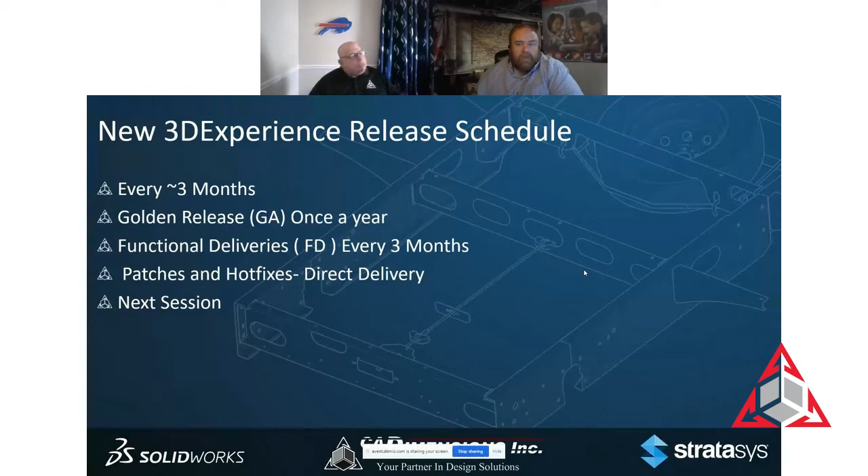When it comes to patches and hotfixes, they're delivered to you directly. As you see me introduce how you launch it, this is also how it will deliver a patch and tell you, hey, this thing has an upgrade for you, go ahead and do so. So that's the release schedule. The next release is about another 2 months away. This one just came out. It comes really fast, so the release schedule is nice because you're constantly getting new tools in the arsenal.

So let's start to walk through the top 10 enhancements in FD03. I understand we've got a big group online. Some of you have seen the 3D Experience platform, some of you are using it, and some of you may have never seen it. So I'm going to do a little bit of backstory on each of these so you know where it was and where it is now. Here are the top 10 enhancements, focused on SolidWorks users in those particular roles. The first one I want to introduce is something we call the Welcome app.

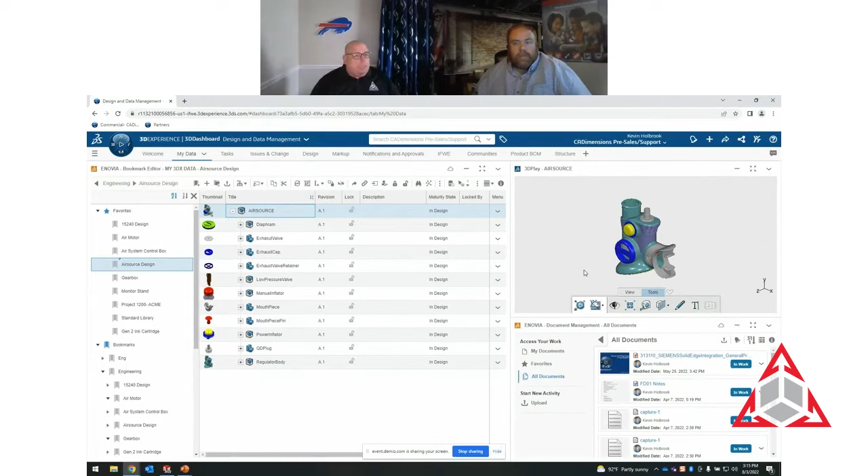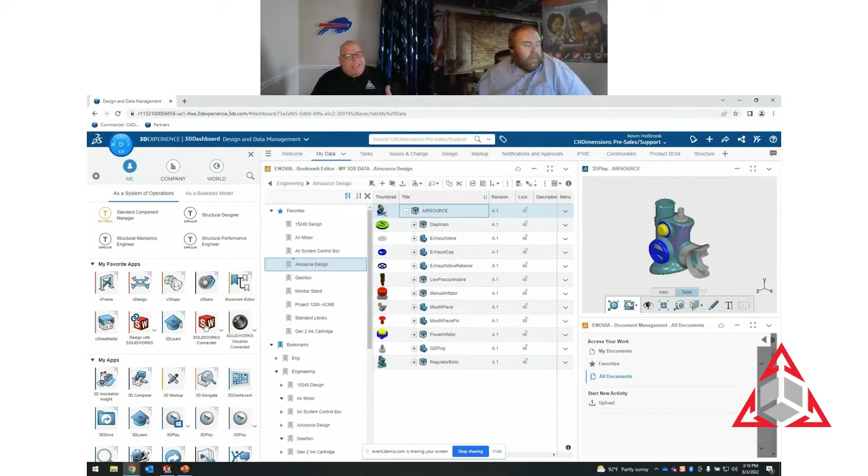I'm going to jump to my 3D Experience platform. Clearly, this is outside of SolidWorks. The reason I bring you here is because prior to FD03, if you're going to launch 3D Experience SolidWorks, we recommend that you go to the web page and launch it using an icon. Let me show you what this looks like. It's just an icon that says Launch SolidWorks Connected. If I click on it, it will launch SolidWorks Connected locally on my machine. That's a fine process, but they wanted to make that whole thing a little easier.

So they've created a welcome app, and I'm going to introduce you to this. The welcome app runs in the web page, and it becomes the landing page for the cloud. When I first jump out here, I can be welcomed with this screen at all times. It has a bunch of things on it. First, it has links to the Learning Center, a series of learning videos. Regardless of what you're trying to learn, there's a bunch of content for you to consume. There are also links to public communities. If you've ever posted in the SolidWorks forum or other communities, those will be listed here as well.

But most importantly is this area off to the left. When I launch the Welcome app, it's going to take a look at your machine and your login and give you some insight into the apps that you have access to. It groups together the design apps, really what this session is focused on, into one section so I can clearly see what I have access to.

Now, to the right of each of these bars, you'll find a button that will allow you to open it right up from here. So I don't have to go and find the icon; I can open it directly. There is also a little information window here that has links to some of the learning specifically for that app.

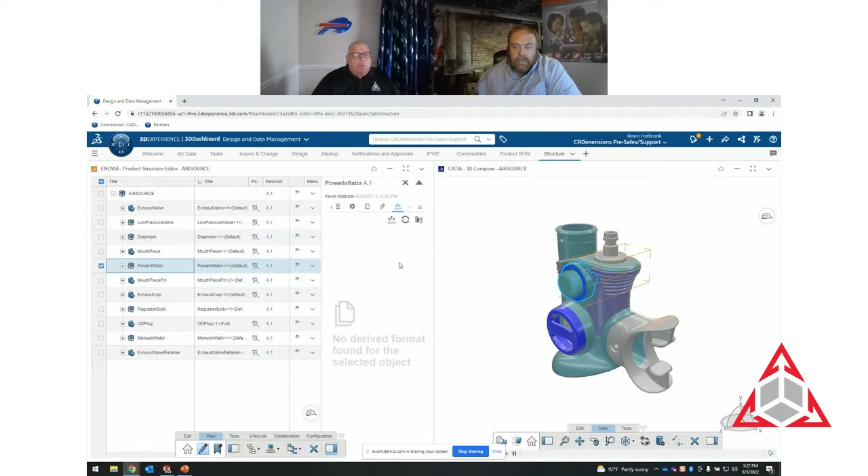Okay. Once they're all generated, or you have what you need, we often got asked, well, how do I gather up all the step files and the PDF files, put them in a zip file, and send them to somebody? Well, that's very simple now as well. So if I click the upper level assembly, there's a button here that says download all derived outputs.

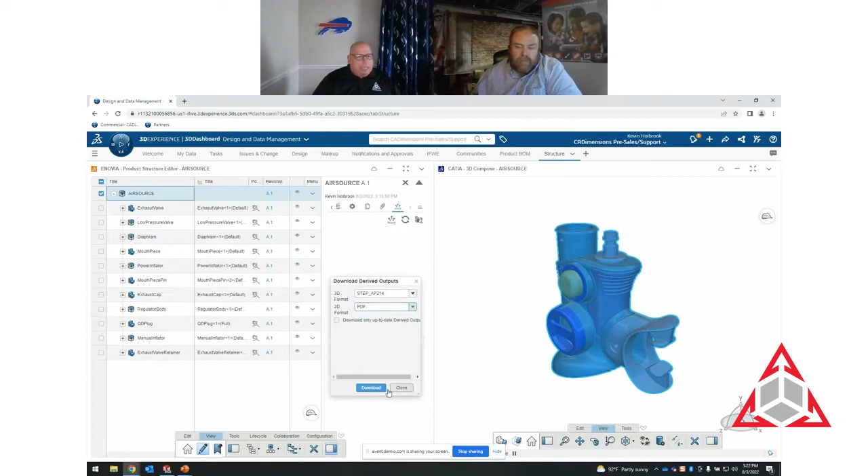I can say, give me STEP files for 3D models, PDF for the other, and I say download. Now, I don't know how many STEP or PDFs are in here, but I'll immediately get a zip, and I can open this up and see the files that were exported from that. So nice, easy ways to self-serve STEP and PDF files.

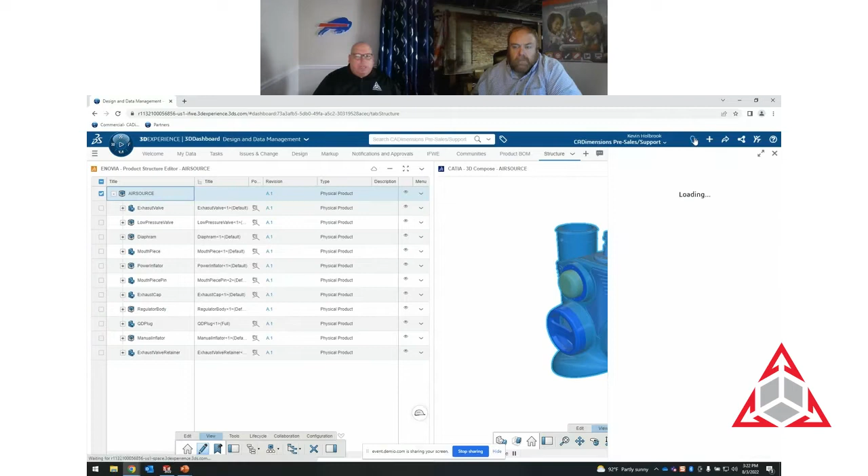Let me show you what this looks like when you generate an extraction. The extraction shows up as basically an email saying your export is ready. If you click on it, it brings you to a location where you just have a download button to download the zip file. That zip file will show up in your downloads folder, and then you can open it up and all of your CAD files will exist in there.

So here we go, go ahead and open it up, and you can see there's all the files from SOLIDWORKS. Fairly new, and it's going to allow us to get data out much easier. Now, these were the only two enhancements that were focused on the CAD process, not necessarily the CAD.

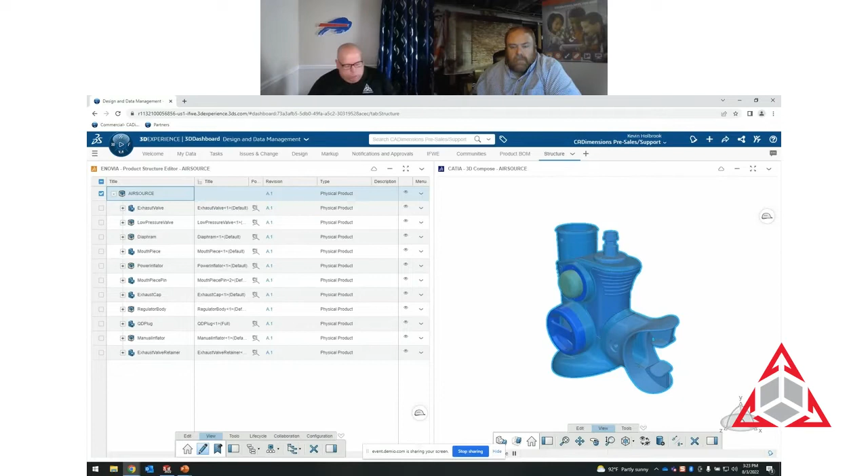So let me transition over, and let's talk about what's new, item number 3. This is probably the most anticipated enhancement in FD03. 3D Experience SOLIDWORKS, which I'm going to introduce here in a second and give you a look around, is cloud connected. In other words, it always must be connected to the cloud until FD03, which we can now perform an offline mode. So offline mode, what does that mean?

Offline mode means that you can disconnect from the internet at 30-day increments. The rule is you must grab any files that you need, pull them down from the cloud, because you can't go access something until you reconnect, right? If the internet went down, you can't do that.

Before I introduce where offline mode is, I think it makes sense for those on the call that have never seen SOLIDWORKS Connected to get a look around. What should I expect to see within this environment? Let me turn that pin off here.

So SOLIDWORKS Connected, because it's launched from the web page, the welcome app like you saw, launches local on the machine, but this version of SOLIDWORKS is a little different. This version has the cloud completely embedded in it. I have a toolbar in my command manager with functions specifically related to data management on the cloud. I will have on the right-hand side two tabs in my task pane: one that compares the files I have open to what the latest is on the cloud, and one we call the Cache Explorer, which I'm going to introduce a little bit more in a second.

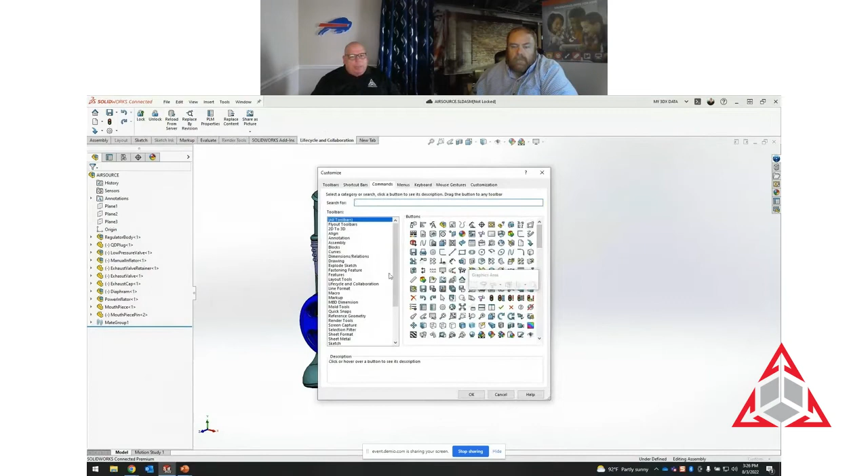So the reality is that this is a SOLIDWORKS version where the cloud is built into everything we do. Even at the top where it used to say here's the file you have open, it tells you whether you've locked the file or not. It tells you where you're connected to on the cloud. It tells you what you're logged in as on the cloud. If I were to try to customize a toolbar, I can add my lifecycle and collaboration tools to any toolbar. So this is a different level of SOLIDWORKS than you may have seen.

So this is SOLIDWORKS Connected. Now, because it needs to be connected to the cloud and integrated as closely as possible, they did make some changes, even to things like the pull-down menu. Save or save as are now saved to the cloud or saved to this PC. Instead of save as STEP, it's now export as, because we're exporting it from the cloud as a new version.

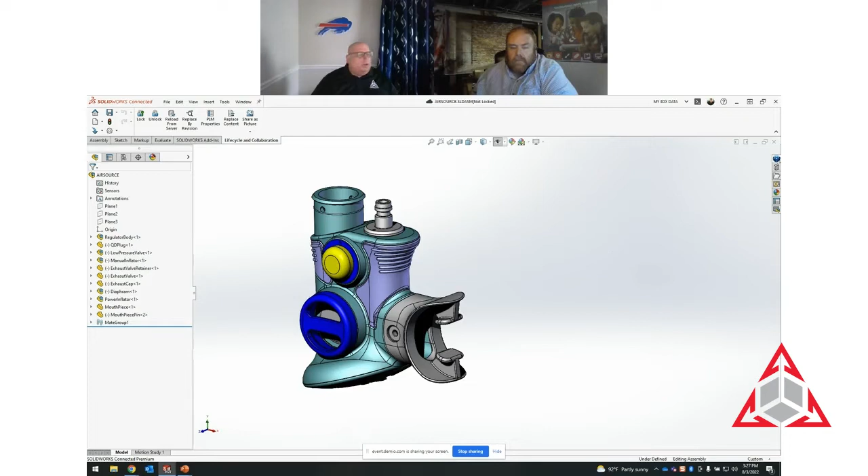So this is what the connected version looks like, and this is what we're going to highlight over this session, over weeks. We're going to talk about workflows. We're going to talk about how to use certain things, replace parts, change names, things like that. But this is SOLIDWORKS Connected. Now, the connector, the other version I've been talking about, is really just SOLIDWORKS as you know it today. The only difference is you have the add-in and the Cache Explorer, the two tabs.

Everything else about SOLIDWORKS is exactly the same. It's desktop SOLIDWORKS as you know it.

Okay, now back to our top 10 what's new: offline mode. So here I've opened up a file, and now I want to go offline. I'm going to go away for 30 days. I'm going to work on this assembly. I don't need the internet. I don't need to be connected.

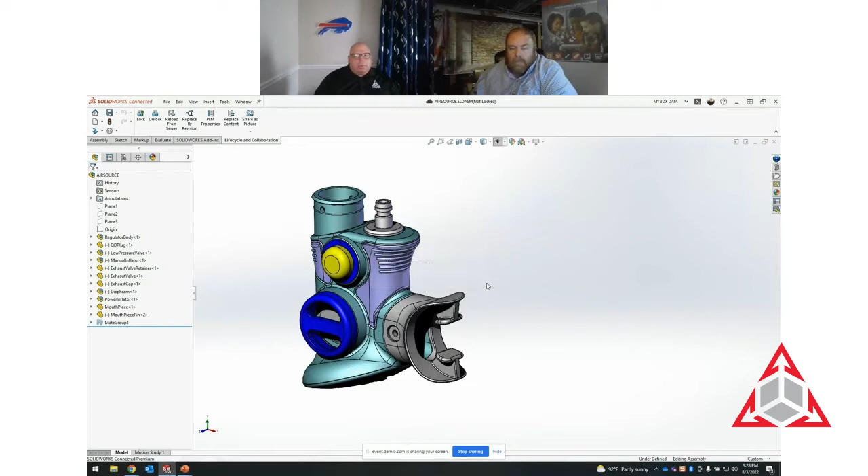If you go in the upper right-hand corner of your SOLIDWORKS Connected, that's where your login is. If I select that login, there's an option in here to work offline. And it tells you, hey, first of all, you must close all your documents. So let's go ahead and close that. Let's just see exactly what it tells us here.

Now it just kind of guides you through. Hey, if you want to go offline, this will take effect immediately. You can work offline for up to 30 days, and you could reconnect at any time. After 30 days, it will automatically reconnect you. It has to make sure that it's pulled the new license for an additional 30 days.

Make sure that you have downloaded all the files and that you're ready to go. This allows you to disconnect from the cloud whenever you feel like you're getting on the plane. You know you're not going to have service. Pull down the files, disconnect, and work.

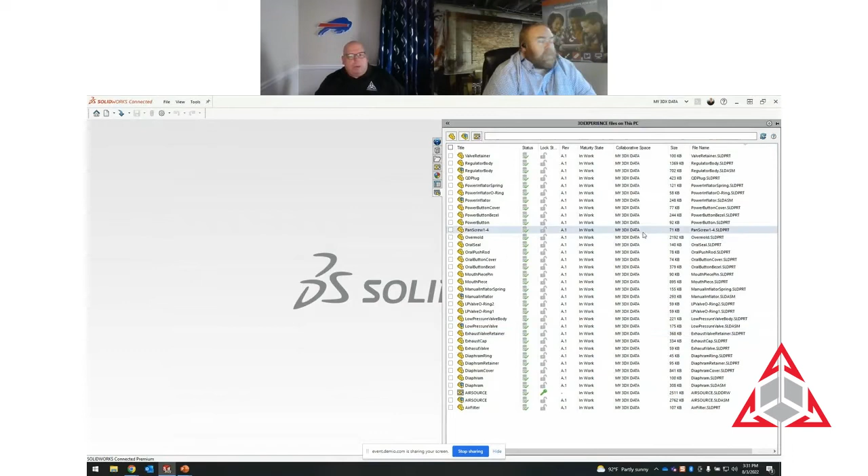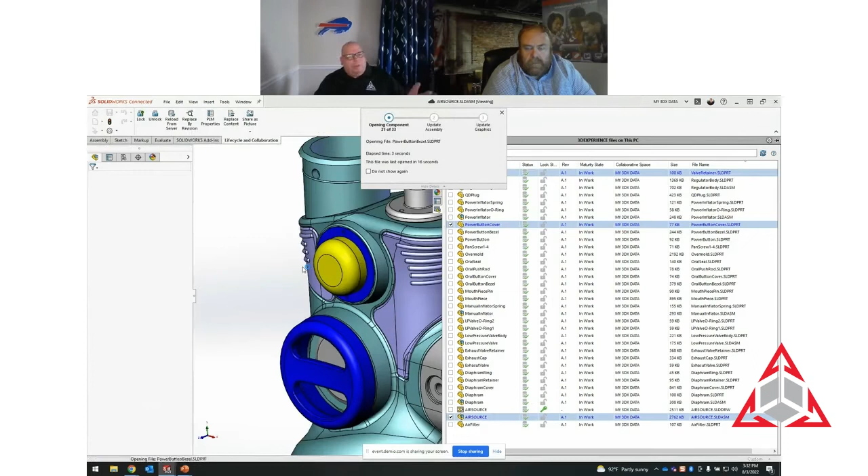What I love the most, however, is the ability - they gave you this in the last release - the ability to delete from my PC. But I love this: you can actually now open directly from here. So I can take this file, drag and drop it directly into the open screen, and open the file directly from my cache. I really don't even have to go to my cache anymore. I can really just work out of this Cache Explorer.

Now, when something is open in the Cache Explorer, you can see, because of my settings here, the valve retainer, power button, and air source. I have multiple files that have been opened because of some of the references. So there does give some feedback along the way as well.

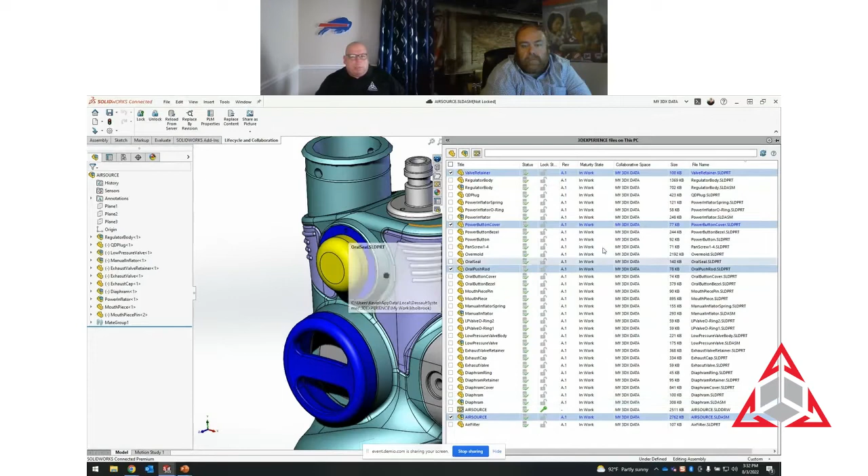So Cache Explorer enhancements, that was a big one with FD03. I'm going to close this down. You can see here's the other two files that got opened in the background. That's just because of my settings.

Insert from search. Let me explain this. This was just another little nuance of what they're trying to do with integration.

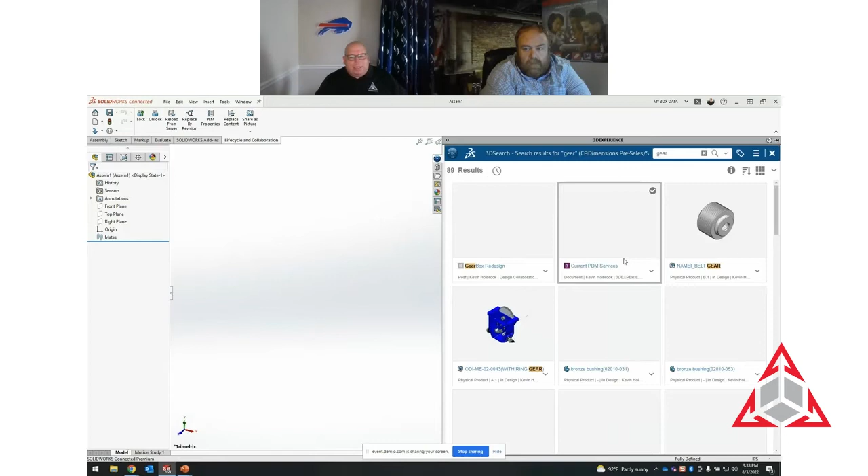So I'm going to open up an assembly, and I want to add a file to the assembly from the cloud. So it doesn't exist on my machine, it's not cached locally. So what I can do in this case is search on a particular file. Let's just search on gear, and I'll find a gear in my system that makes sense to drop in. Now, it's allowed you to drop in for a while, but it hasn't done a full integration. In other words, it didn't act like a SOLIDWORKS file would if I drag and dropped it from Windows Explorer. It didn't treat it the same.

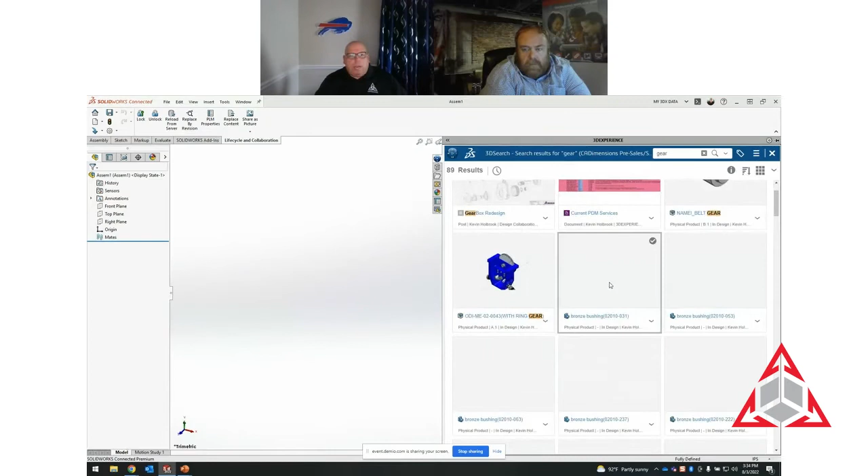So what I really wanted to do is treat it the same. Let's just take one of these bushings. When I drag and drop now into the assembly, it will launch the insert component command.

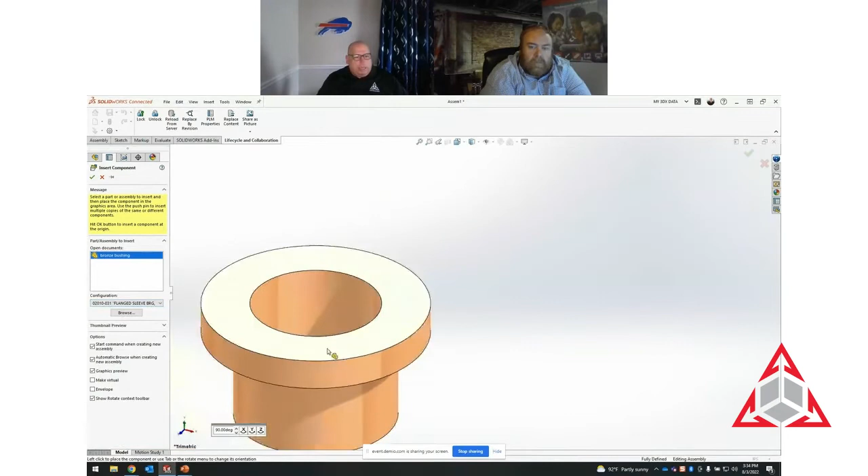Now there's a couple reasons why that's important. One, we can switch configurations. This bushing has many different sizes, and I can pick the size I want directly from the cloud. Another thing I really like is you can get your rotations in here. You can also set up some of your default options for your initial drop-in, and you can drop in multiples if I had that option selected.

Before, I used to just drag and drop it in, and it would do nothing. It wouldn't bring up a dialog. It was not aware of the fact that it was going into SOLIDWORKS. I think this should be a good indication of how tight they're making this integration with the 3D Experience platform.

Okay, so we're up to 5 here. Let's keep going. Some basic revision enhancements. Let's open up our AIRSOURCE again. I'll just do that right from my cache.

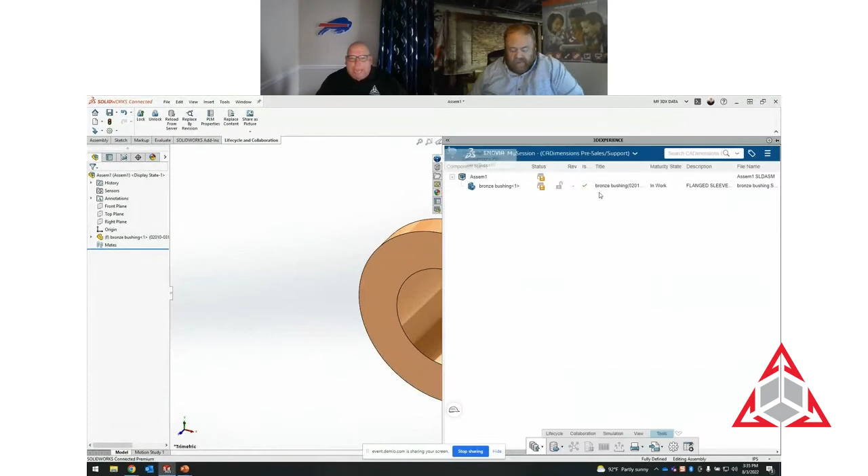Now, since I already have a file open, what I usually do is drop it right on my command manager. Then it knows I'm not trying to drop it into a part, and it will open up my files in its own window, and I can continue to move.

Now, what they've done in FD03, first thing they've done is changed what it looks like. Let me expand this column out, the one that says, is this the latest revision of a file? So you can see clearly that this overmold is not the latest revision. This icon is different - it used to be a tiny little plus sign, you almost cannot make it out. Well, now with the red X's, you can make out what's going on here.

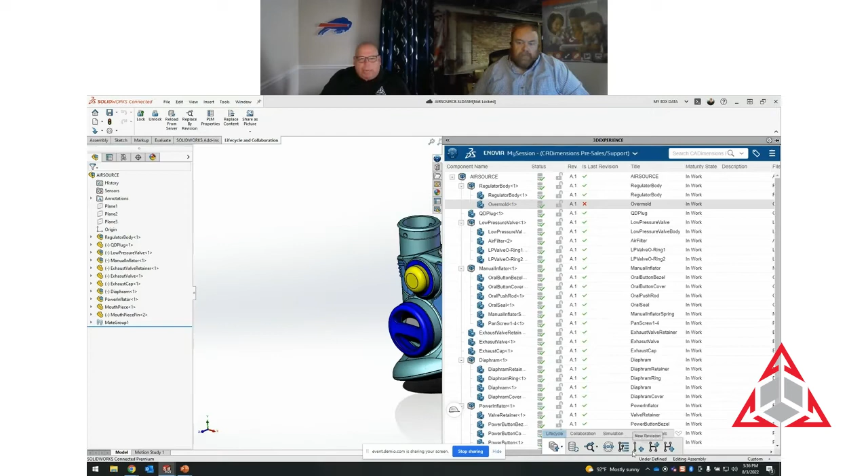The other thing they've done is added the revisions icon to the action toolbar at the bottom. So now, if I wanted to load another revision, I can go back and see what revisions there are and make the decision of what I want to do. Now, to actually do the load, all I do is say, hey, I want to replace by revision, and I want to pick the latest revision, in this case, to load.

So it makes it a little bit easier to see. I can also see how many revisions have been created, and I can load the one that I want without a problem. Simple little things, but it makes the workflow that much easier.

Also, default bookmarks. Now, for those of you who have never used the platform, I need to explain what a bookmark is. When we save files to the cloud, we need a way of organizing, because we're not saving them to Windows - there's no Windows folders. That technology is a little different. So we use something called the bookmark editor. For all intents and purposes, the bookmark editor is nothing more than folders.

It's a little different when you dig in deep, but as you can see here, double click to open. When I get to what I'm looking for, the file exists when I get there. It's really a folder system. Well, when I save files to the cloud, I can choose which bookmark things go to.

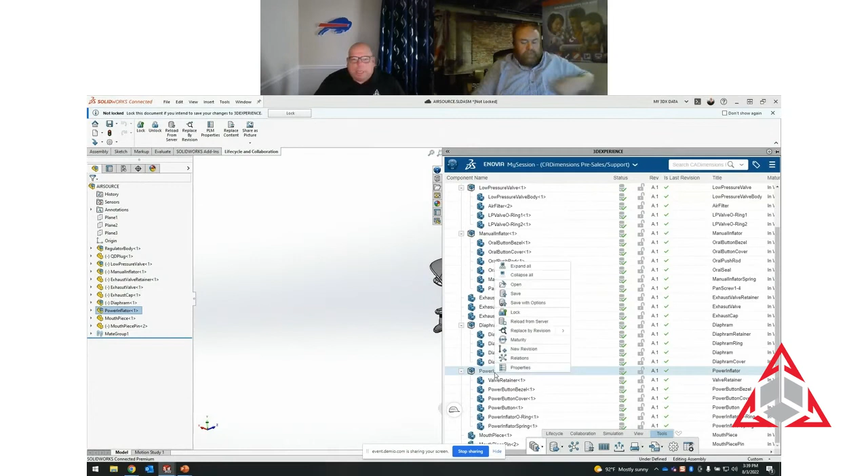So match drawing to parent. Let's pick one. Let's see here. Let's just take this here. We'll open this thing up in its own window. I want to create a drawing for this, but I want the title of the drawing to be named exactly the same as the assembly.

Inside the add-in is going to be an option that says use the part or assembly title as the new drawing title. So whenever I create a new drawing, I don't have to give it a name. I'm basically telling it to name it the same as the part or assembly that's used to create it. Now I can do that when it's first saved or every time it saves.

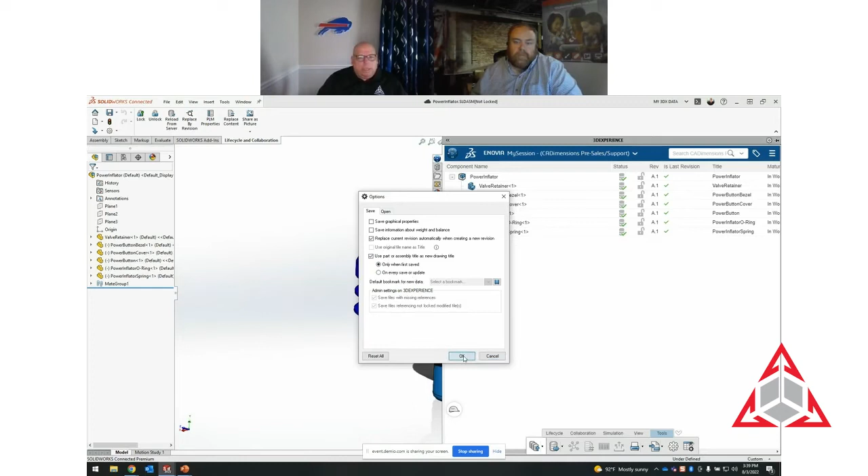Why would you do it every time? Because if the part or assembly title changes, it will change the drawing title to match, so there's never a mismatch. Now I'm going to keep mine as only when you first save. So let's create a new drawing. Okay, we just said power inflator here. I'm just going to put a single view on here just for the sake of our conversation.

Now you can see right here, the title is empty. It knows what the name of the file is because the file was attached. Now the reason I'm focused on title, it's probably confusing, but title is the unique identifier on the platform. You can't put two files out on the platform, in the cloud, that have the same title unless you want to.

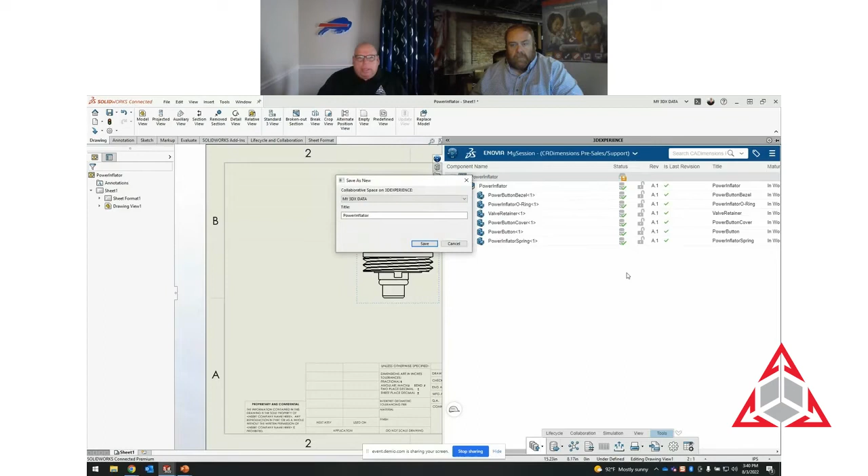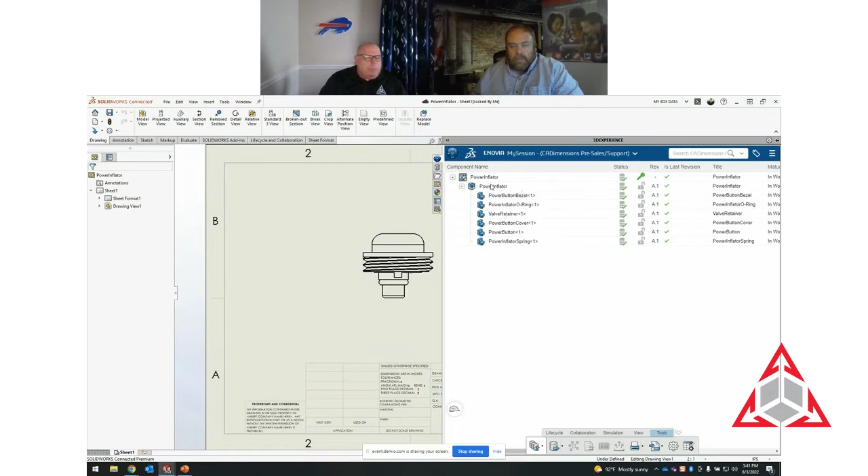So watch what happens when I do a cloud save. I'm just going to do a simple cloud save of the drawing. I tell it where I want it to be stored. And you'll see that it automatically pulled the title from the assembly that was on it, and this will be pre-populated. So that will maintain a relationship here. This will keep those in line and keep those connected. So that is new in FD03.

I saved the best for last. I truly believe this is a game changer. It's a new way of collaborating with stakeholders. Stakeholders that take your data and are going to make modifications or add their own files to it. And then you're responsible to bring it back into the cloud and incorporate their changes into your data. Let me show you this.

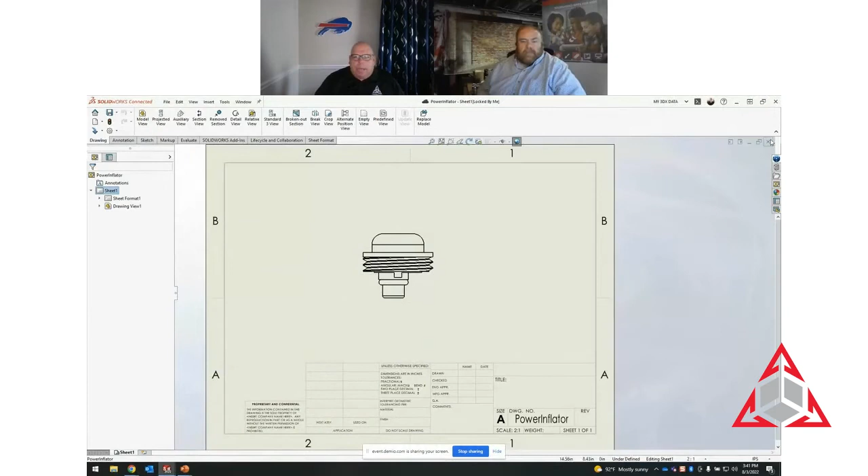This is really phenomenal. So I'm just going to go back to our air source here for our example. I want to be able to send this to an external vendor, and I only want them to be able to update one subassembly in the upper level. So in my tools action bar is a command that allows me to both import and export a package.

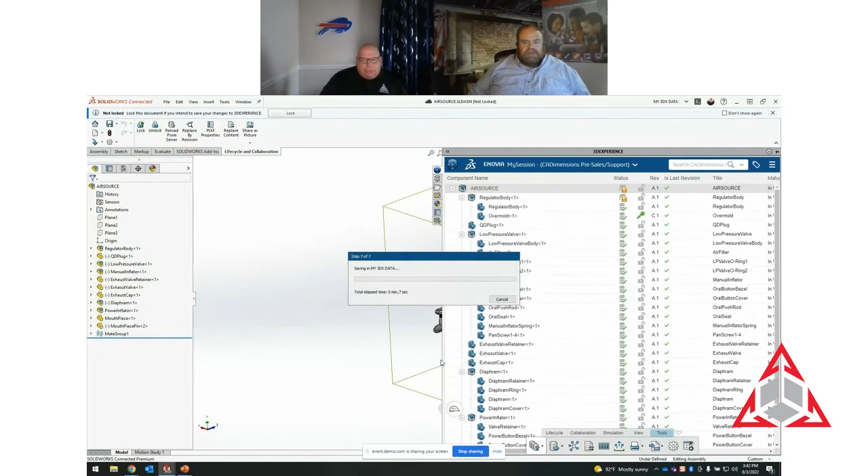When I export a package, oh, it's telling me save it. Let me just do a quick save on this. When I do a save, it's doing a cloud save. Any changes that I've made on the files, it will update them on the cloud side. It sees that I changed the revision, that part's part of an assembly, and that assembly is part of the upper level, so it's asking me to update those.

Let me also unlock all these files. There's no need for me to have them locked. These are kind of outside the scope of what we're talking about. So I want to create an export because I want to give this to an external vendor. When I do this, it will open up an app that runs directly in the task pane that allows me to choose what the external vendor is going to have access to.

We'll use this first section here. I want the external vendor to be able to add files to the upper level assembly, modify the power inflator, but I only want them working on the valve retainer.

I can control which files they can edit. Now, there is also a button up here to add drawings. So if there happens to be a drawing related to this, I can say add drawings, and it says, oh, there's one drawing found, and it will add it to the list of drawings, and you can say, does it go out for edit or read only? But you can choose what's done there, okay?

What it's gonna do is create a new type of zip file. It has a completely unique extension. It's an SLD PKG, a SOLIDWORKS package. Once we get this set, we choose where we're going to deliver it to the customer. We can save it directly to our machine, so give it a name, and it saves the SLD PKG wherever you want. You can send it in an email or another delivery system. For those of you who are aware, the platform has a Dropbox-like delivery system we call 3D Drive. We can actually save it directly to 3D Drive.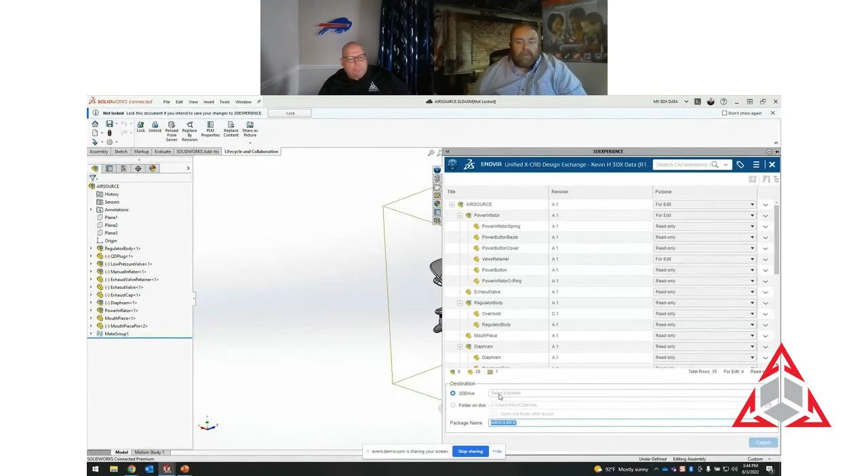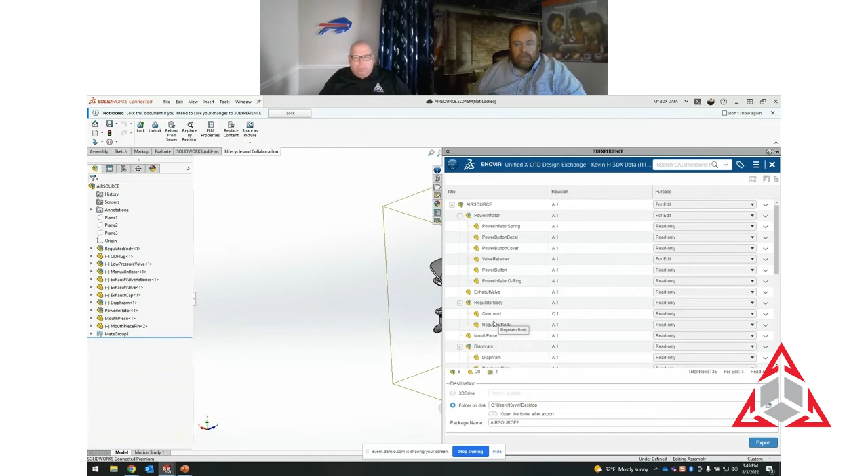Okay. In this case, I'm just going to call this Air Source 2, and we'll go ahead and export this to my desktop. Okay. Now, what does the customer get? How does the customer even work with an SLD PKG? On the SOLIDWORKS website is going to be a free add-in that you can point them to that they can download that will allow them to do a simple import of a package. It's going to look a lot like what I'm getting ready to do here. So imagine somebody who doesn't have the cloud, doesn't have connected, but still wants to work with you. You could do an import package.

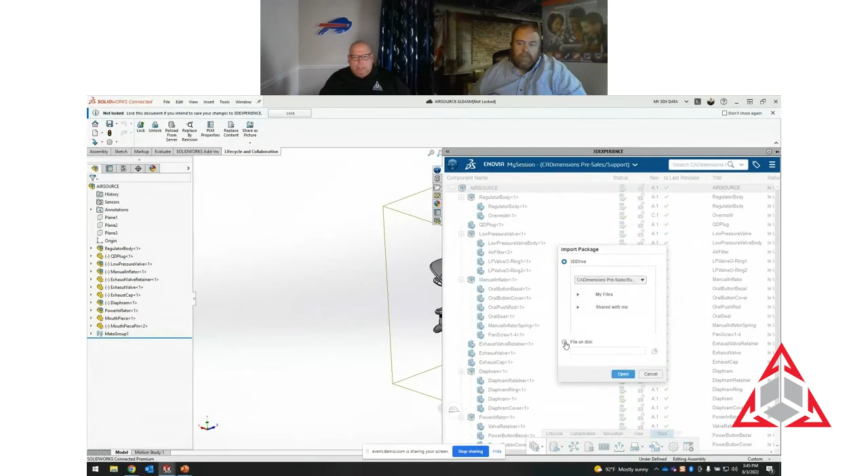Okay, I'm going to pick this. I have one on the disk that I can show just for an example. And when they select open, it's going to show them what files they have access to. Okay, this will bring it open. They're going to be able to pick a single file and open it up from here. So notice this matches, here's the files you have read access. Here's the ones you have edit. Now this is an old one that I made. You can see I have a little bit more for edit.

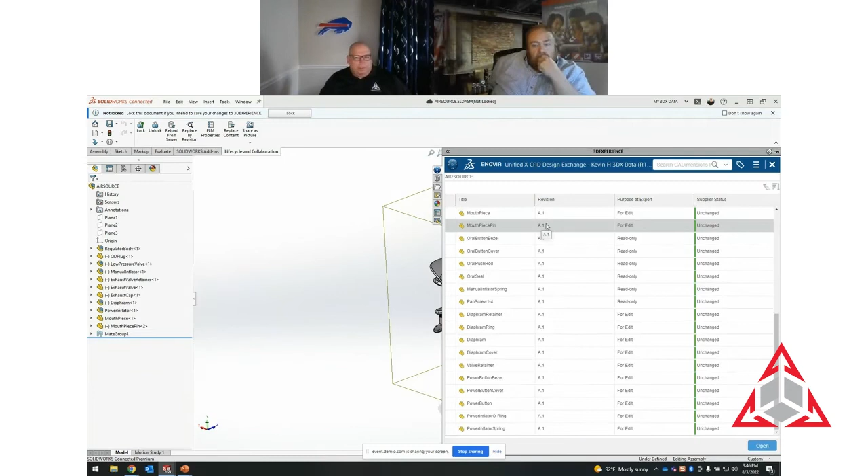Now for you, when you get the package back from the customer, you're going to have this supplier status column that shows you if the supplier has changed any of the files that you've given edit permissions on. It's kind of hard for me to make an example by myself, but if it was changed, there's going to be an option to overwrite the current rev if it's in work, or create a new revision. So this function is going to allow you to export and control permissions, bring it back, and integrate it back into your data management solution, all while you're in SOLIDWORKS. Okay. This is new in FD03.

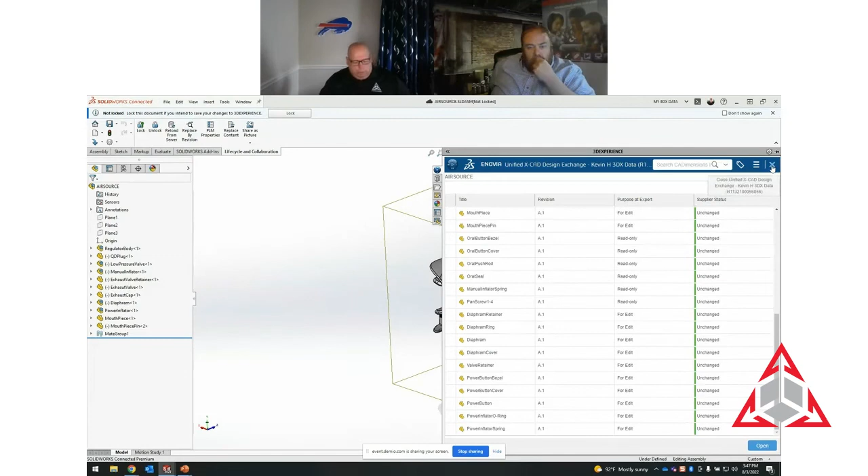The last thing I wanted to talk you through is XApps. I didn't want to leave these out. There was a lot of good stuff in 3D Experience SOLIDWORKS. The XApps are, we'll call them, growing up, right? They're becoming SOLIDWORKS on the cloud.

They're, I explained to somebody, they're like a tweenager. They're still a little bit awkward. There's some things they don't do very well, but you know it's going to be good. At least that's what I think of my tweenager.

But I wanted to show you what they've enhanced in XDesign, because you're going to clearly see that these are things that we've had in SolidWorks for a while. But they're adding these things because they're going to make this thing look like and be like SolidWorks. So here are the 5 things that I highlighted just in XDesign. And then I'm going to take you in and do a variable fillet so you can get a sense of what it looks like.

So first of all, they've updated the design manager, just like the feature manager, to give better feedback. They've added variable fillets. Loft selection manager, that's something we've had in SolidWorks Desktop. The ability to flip a mate alignment, right? Something that we take for granted, but it's now in the XDesign tool. And then sketch patterns that automate the dimensions. Now you're immediately going to look at that and say, yeah, I have that on desktop. What I want you to just consider is that this tool is growing up.

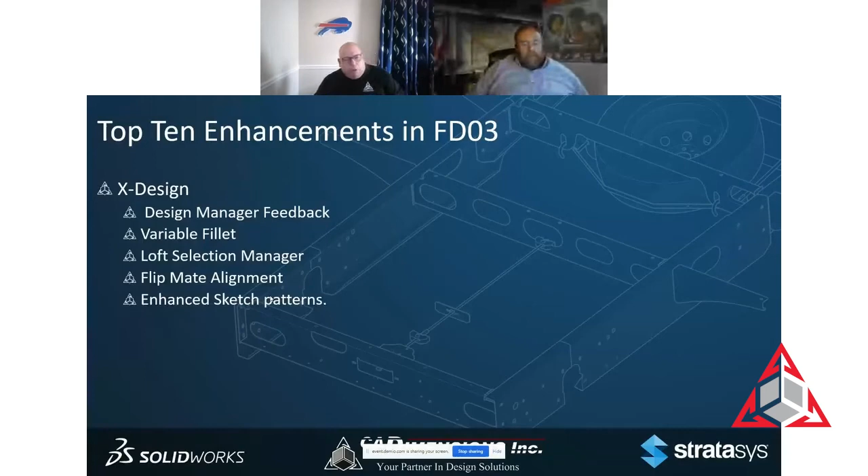This is going to be as good as SolidWorks Desktop someday, but we'll be able to run it completely on the cloud. So let me show you what it looks like. Okay. So in my web page for the cloud, I have my XDesign loaded on a tab, so I can launch my, let me just refresh my page here. I can launch my design app directly from the web page.

Okay. In this case, I want to create a new part. We're just going to call this webinar. And when I create the part, this is just like doing file new inside of SolidWorks, right? It's going to go ahead and create the file. It's going to store it in the cloud data storage, and it's going to give me access.

Now, let's see if I can get this thing out of the way here so you can see the whole toolbar. I'm not going to spend a lot of time in all the details. We'll probably cover some things in either next month's session or after that and get a little bit more detail. But you should probably already see this. It looks a lot like SolidWorks. Sketch, features, surfaces, assembly. But let's go ahead and create a quick block, and we'll put a variable fillet on it. This is going to look just like SolidWorks.

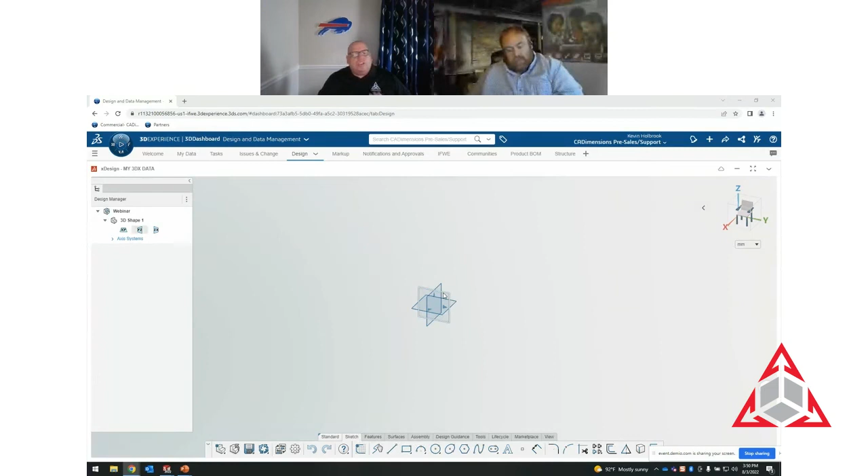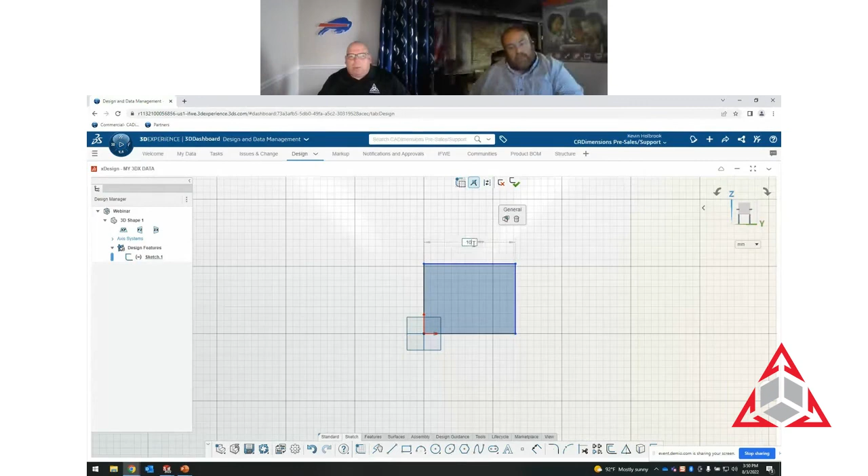I pick a plane. I create a sketch. It brings it normal. I hit my S key. It allows me to grab a rectangle. I can draw the rectangle. Now here's something unique to XDesign. Instead of adding a dimension using the dimension command, I could just pick the line, pick the dimension, and type in the value that I want. Makes it a whole lot faster to do what I want.

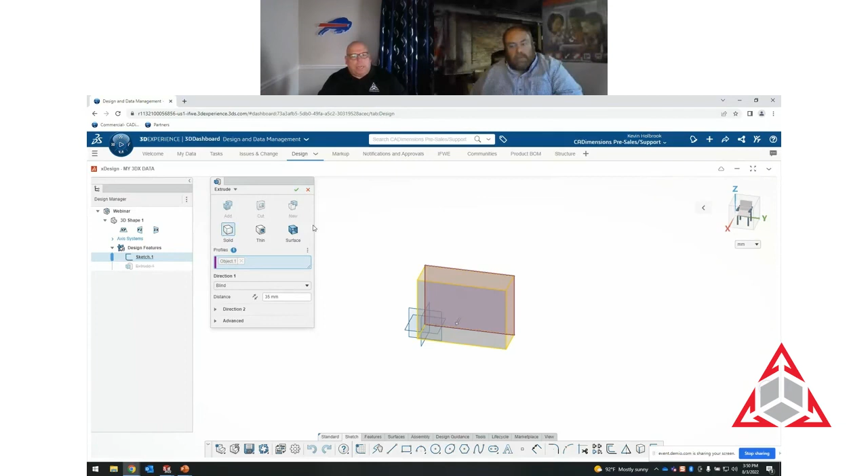I can exit my sketch, hit my S key again, and go ahead and extrude, and I can pick the area I want to extrude. Notice the dialog for extrude has everything built into it. Add, cut, thin, surface. I can create anything. We call these super features, but they're still very SolidWorks-like. So let's talk about variable fillet, something that they've added in FD03, a function that didn't exist.

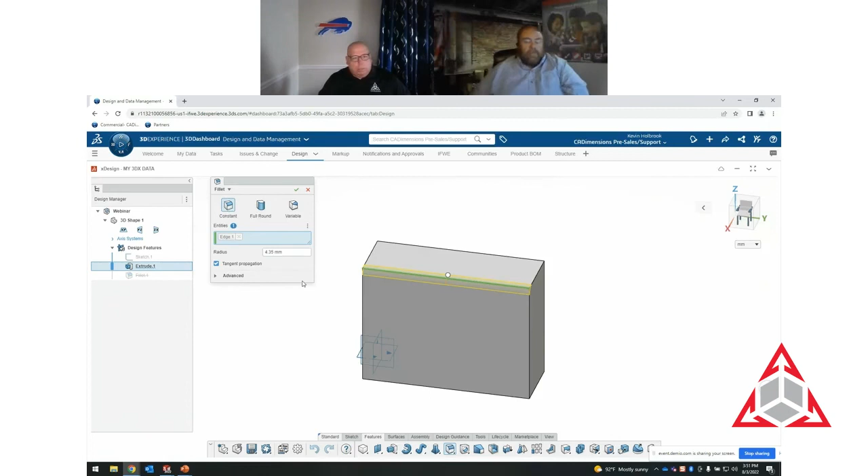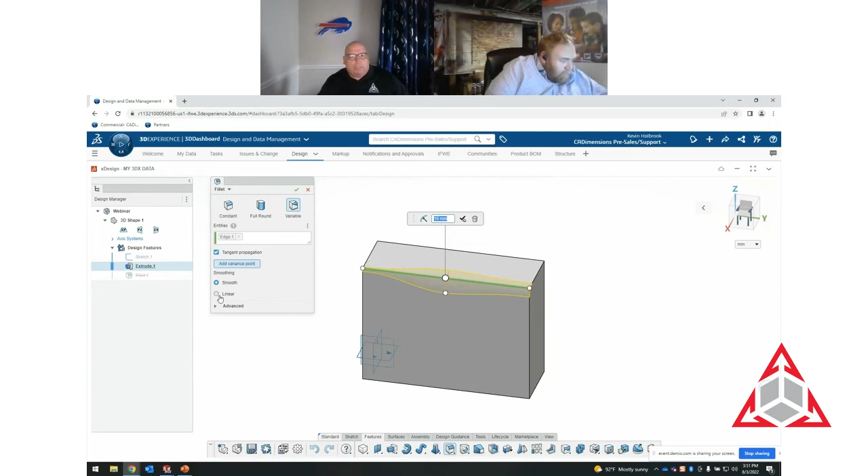Let's go ahead and add a fillet. I'll pick an edge. We have constant, full round, and variable, just like SolidWorks. Let's go ahead and select the variable fillet. I want this end to be 2, this end to be 6, and now I want to create a control point in the center. So I can add a variance point, I can pick a location that I want it, and then I can control what I want it to be. We'll say this is going to be 10. Okay. Then we have control over how it interpolates between them, linear or smooth, and when I accept it, it adds the variable fillet.

One of the things I absolutely love, if I want to edit that variable fillet, if I double click on it in the platform in XDesign, it takes you right to it. So double clicks get you just about anywhere. Okay.

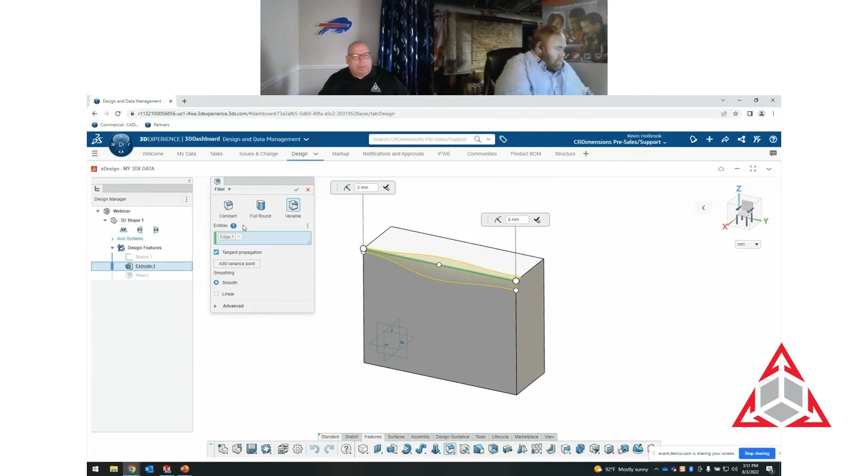We got a question here. We'll tackle it, Brian. That's a great question. I'll finish this and we will definitely answer that. I've noted it. Okay, I definitely want to address that.

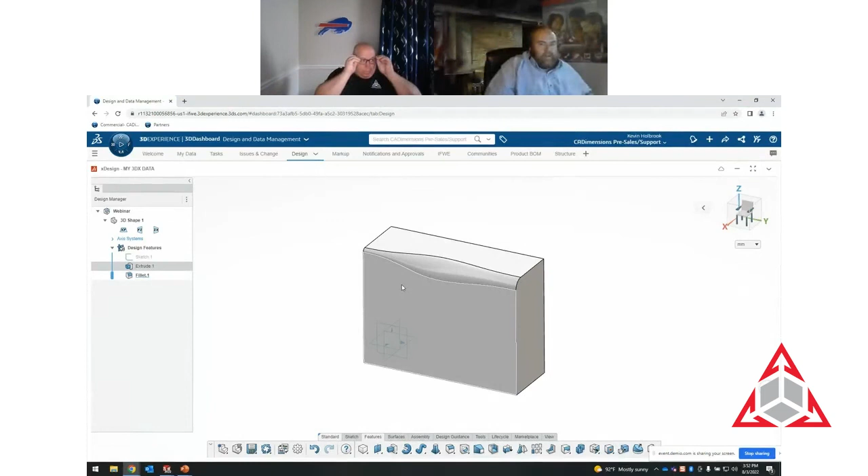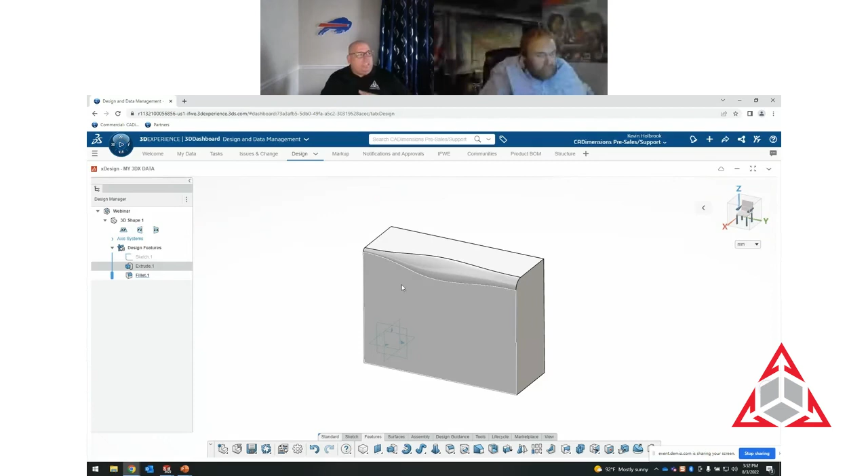That's great. So what I wanted to show you is that I kind of feel like this is, I don't know, 60 to 70% of SolidWorks Desktop. It's getting there, and they're answering a lot of questions about functionality. They're adding things every 3 months. And what I showed you, these 5 things, they've added another 5.

You're probably looking at this: well, where's sheet metal? Where's mold? Where's weldments? Where's drawings? Let me just show you that those all exist. There's a little button here that says switch app, and I can switch to any of those apps. Drawings, weldments, molds, motion, sheet metal, even some swoopy shapes or curve shapes in xShape. And we will cover that in future webinars for sure. I know that's going to be asked.

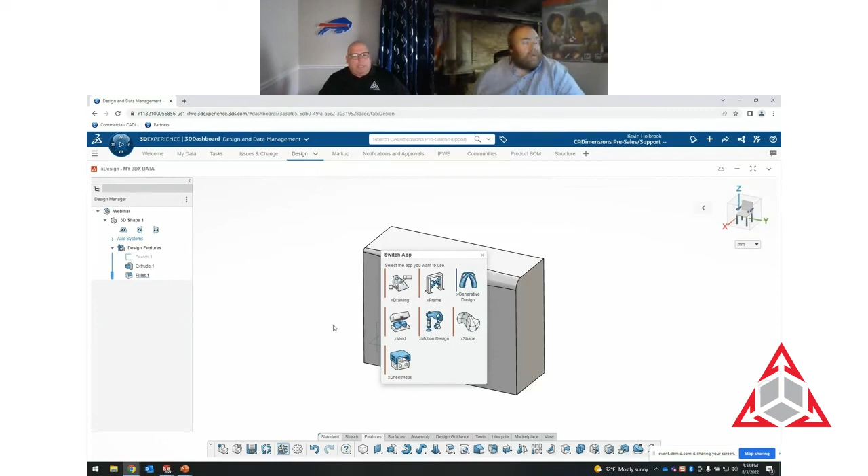But each environment is unique to the individual item. So I just wanted to give you a sense of what XDesign is, how it's growing up along 3DEXPERIENCE SOLIDWORKS. The key to this is they both use the cloud for data storage, navigation, all these other things that I'm showing you are cloud-based. It's all going there. Okay.